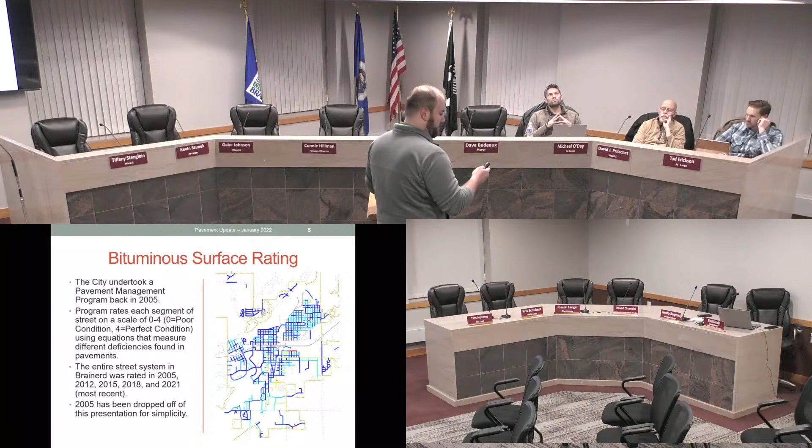So, back when we rated in 2018 compared to 2021, you can see that first line there, 0 being poor, the pavement is completely failed, to excellent being a 4.0. On average, in 2018, the city ranked a 3.35 out of 4. When we rated it in 2021, it was a 3.4 out of 4. So it held pretty consistent.

One thing about these scores is it's very subjective to who's doing it, and people look at things differently. We have interns doing this. We teach new interns every couple of years how to do this and what to look for. And so this data is subjective to who's rating the streets. We try to stay consistent on which segment we're rating, but people do look at things differently. So you'll see some fluctuation in the scores.

For example, if a score goes up from one year to the next, for example the North Annex, 3.81 to a 3.92, we didn't do any construction work in the North Annex in those years, but yet the score went up. That's just a sign of the subjectivity of our data, of who is doing the street rating and how they're looking at different surface deficiencies on the pavement.

So generally, you should see scores that go down unless there's a large project in those 3 years that would indicate the score goes up. We're taking the worst pavements, we're making them new again, and so your score should come up in that area. Southeast is a good example. It went from a 3.31 to a 3.48. We had a large project down there.

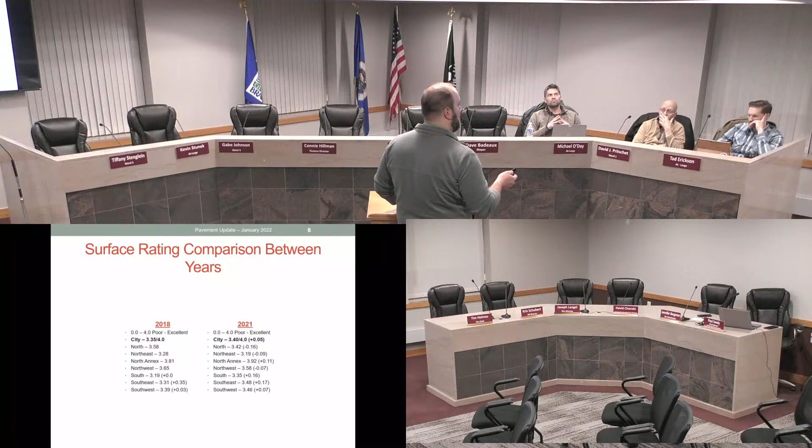This is just an indication of how our pavements are doing, broken down by different areas of town: north, northeast, north annex, northwest, south, southeast, southwest. And it just shows how each of our pavements are doing. So you can see the north annex, that is our best pavements. It's our newest pavements also. And so by that alone, they're going to be doing the best as far as scores are concerned.

You can see that it looks like Northeast is probably doing the worst. Northeast is also our biggest area of streets. It has the most mileage of streets. We have done some projects up there recently, but as the scores would indicate, it definitely needs some more work.

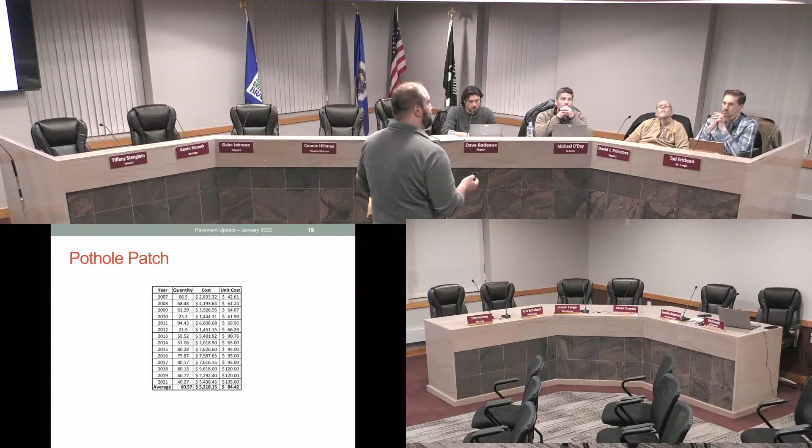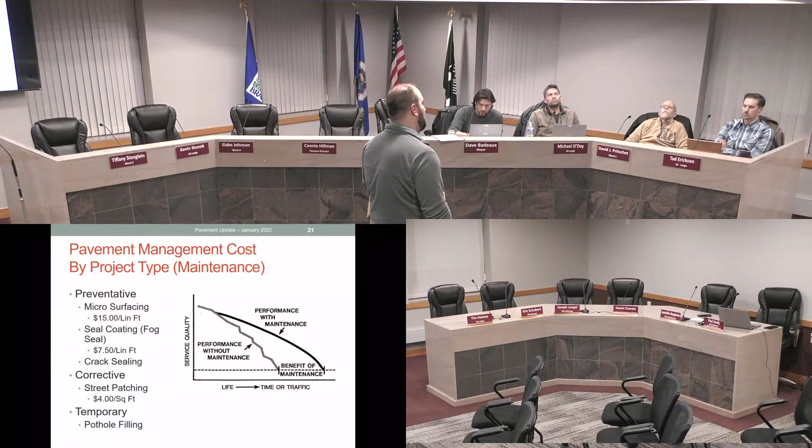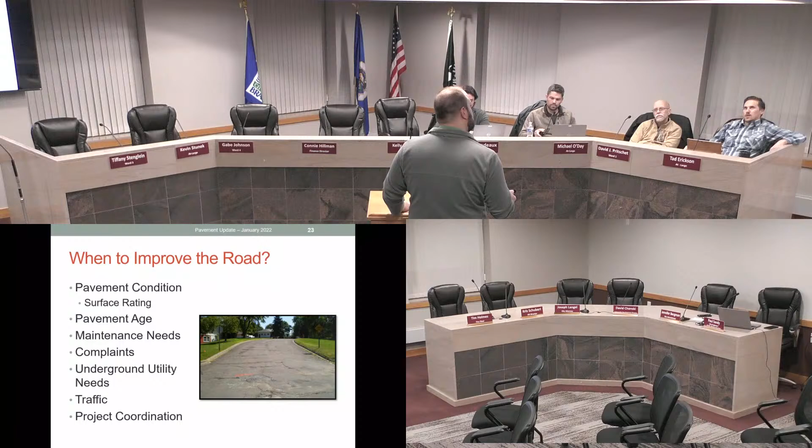More of a comment: you put up the one graph a couple slides back about the $130 per linear foot. That's the total reconstruction, and it's impressed on me. I've seen this before. With the preventative maintenance up front, the goal is pushing that $130 linear foot cost off as far as possible. So the things that you mentioned, like the pothole improvements, the chip seal or the crack sealing, are totally worth the funds to help stretch out that 5-year plan.

Yeah, that's really what you're trying to do, increase the life of the pavement. You can't possibly fund every street you want to do in a given year, and doing that preventative maintenance up front stretches out your funds to make sure that the streets coming into your 5-year plan are in the worst failed condition possible, and you can afford to do all of the worst conditioned streets you can.

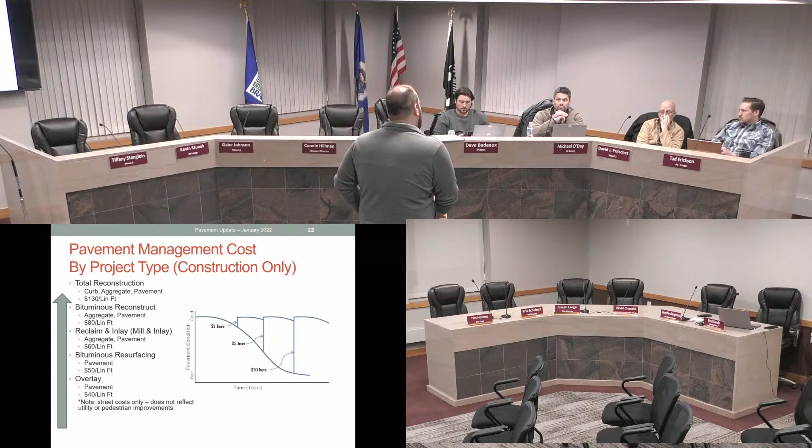We've covered almost half of our 80 miles of streets in 11 years, so you're doing it 4 times as fast as we replace our streets. We're gonna catch up eventually, right? Yeah, I would say we're pretty caught up right now. On average, we should be doing about 2 miles a year of resurfacing or reconstruction. And that puts us on doing every street once every 40 years.

So I'll give the example of a curb and gutter section. We use an 80-year rule. If we install it in year 1, that curb and gutter should last 80 years. So that's 2 pavement cycles. The first 40 years, you go and replace the pavement, resurface the street. The second 40 years after that, we would do a full reconstruct. And so on average, we're keeping up. If you look at that first cost graph, I can show you.

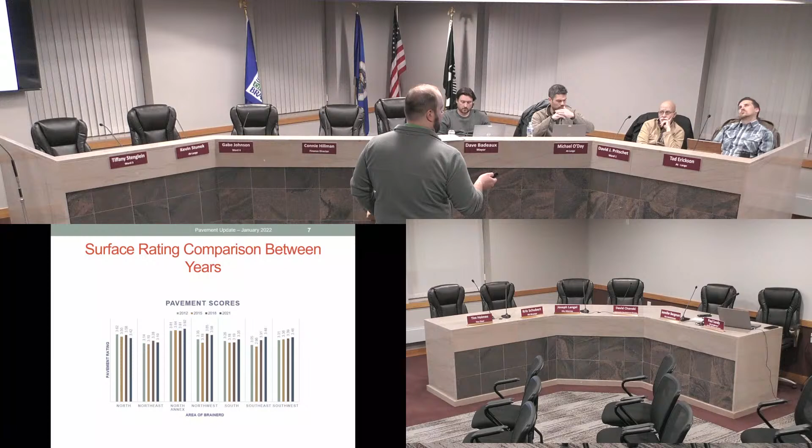Right here, the first number you should look at is that in 11 years, we've done 21.4 miles of streets. So that's reconstructed or resurfaced 21 miles, which is an average of once every 40 years, every 38.91 years. So that's right on target, basically. Maybe we got a little overzealous and did 3 extra blocks, but it's pretty good considering the amount of street system we take care of. And the weather, the nature that we're fighting. Yep.

So from an overall system standpoint, we're in I think very good shape. I think Brainerd street system is very well developed. There's obviously always work that needs to be done. Every time I drive through town, that's all I see is work. But yeah, I think being aggressive these last 10 to 15 years has really paid off. We've really done a lot of streets. We haven't expanded our system, which just, we take on extra liability, right? Anytime we expand, we take on extra liability.

So I do remember, I think College Drive was used as like an experiment years ago, some experimental pavement that didn't really quite work out. In that time, or since then, were there any other pavements or surfacing agents that are more cost effective, last longer, are better for this weather, anything like that coming up that might improve any of this?

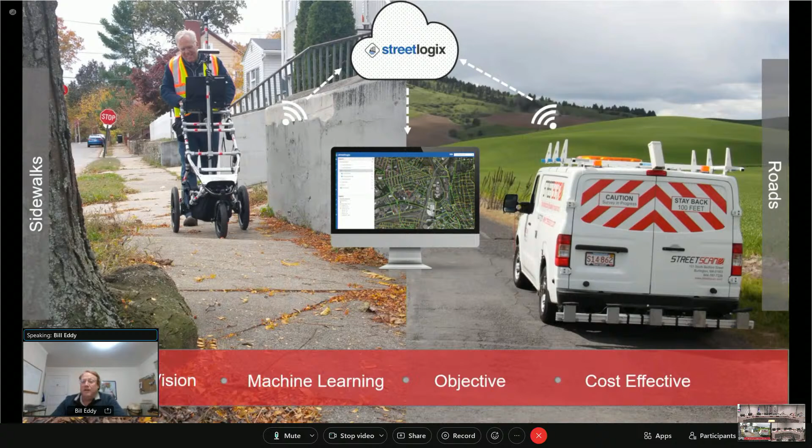So at Street Scan, we've developed an automated approach to infrastructure assessment of roads and sidewalks and other right-of-way assets. We've got a very comprehensive solution that provides objective data and is a very cost-effective approach. We combine computer vision and machine learning to deliver these services, and we've got some specialized vehicles that I'm going to show you here that do these studies.

For the roadways, we have our scan car, which rides your entire road network. You folks have 80 miles or so of roads, and we would do your entire road network. The car is outfitted with a variety of image capturing devices. In the lower right-hand corner, you see an array of 3D cameras mounted on the rear of the car. These are pavement facing, and this is where we're getting very detailed distress data on road conditions.

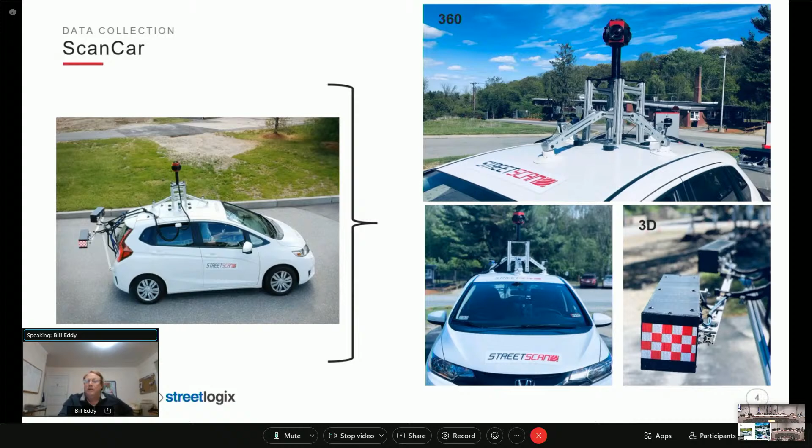On the top of the vehicle, we have a 360-degree camera, or ladybug camera, similar to what you see with the Google cars. So it's like getting your own private Google Street View, and we're capturing not only street images, but also other assets in the right-of-way that you might be interested in assessing and inventorying, things like street signs, street lights and traffic lights. I'll show you a little more detail on that.

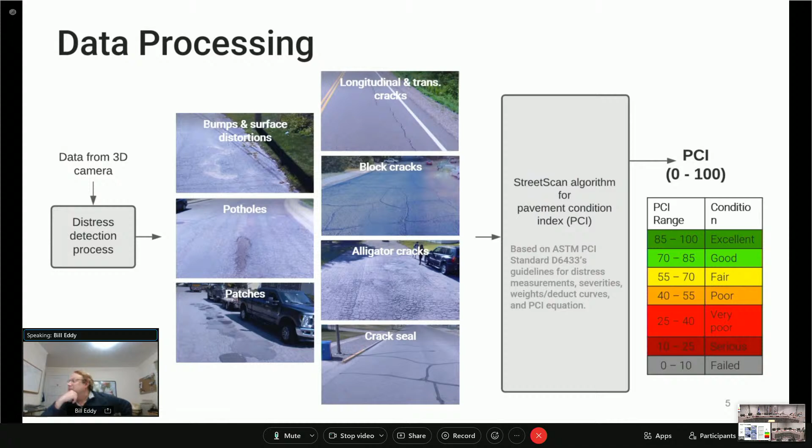Once all of this data has been captured, depending on the size of your network, there's literally terabytes of data generated. We then process that data by applying our artificial intelligence and algorithms to generate street scores based on the ASTM PCI standard, a scale from 0 to 100, 0 being the worst, 100 being the best. We score all of your roads and provide a color-coded map that corresponds with the score each road achieved in the study.

Taking a closer look at the 360-degree camera, we can pull out individual assets like street signs, street lights, catch basins, and pavement markings. These are some of the different objects that can be captured in the right-of-way. We've also found this service is useful not only to the public works folks responsible for maintaining the infrastructure, but the 360-degree imagery can be utilized by other departments, like the fire department, police department, and tax department. So you can get additional value from that service.

For the sidewalks, it's a separate data collection process. We have what we call our scan carts, essentially outfitted with the same types of image capturing devices, and we will walk the entire sidewalk network within the city and create this video library. We're also creating a sidewalk condition index, or SCI score, very similar to the 0 to 100 for the pavement scores.

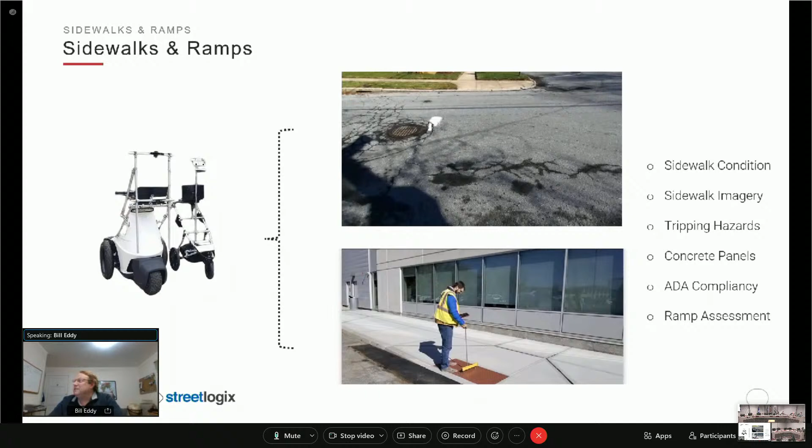This way you're able to categorize the sidewalks and put maintenance activities in place based on their condition. We're also able to capture all of your ramps within the city for ADA compliance. As you'll see when I show you the StreetLogix asset management platform, we create a separate layer for each, so you can click on streets, sidewalks, or ramps, and it will bring up the corresponding data for those assets.

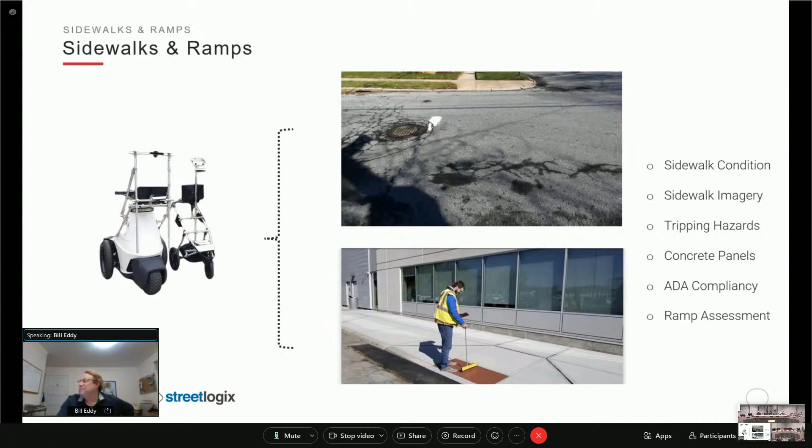So I'm going to jump into the StreetLogix piece now, but we kind of like to equate the data piece, all that data collection, as kind of the body of the solution. But really where the rubber meets the road, so to speak, and where the real differentiators are, is with how do I then visualize and manipulate that data for my maintenance operations.

So the StreetLogix platform is a highly robust, highly customizable platform that allows you to really create budget plans, capital plans. A lot of the historical data, Paul, that you mentioned that you have, can all be loaded into our system. In addition, if we go ahead and are scanning your roads, we include all that data as well.

So I'm going to jump out of this unless there's any questions. I don't know how your time schedule is here tonight. We can answer questions at the end, or if you've got any questions as I move into the Streetlogix platform here. Bill, how much do you have left, do you think, if we just let you roll through it? Yeah, I'd say about 10, 12 minutes. Okay, yeah, go ahead and just finish up. We'll talk at the end then.

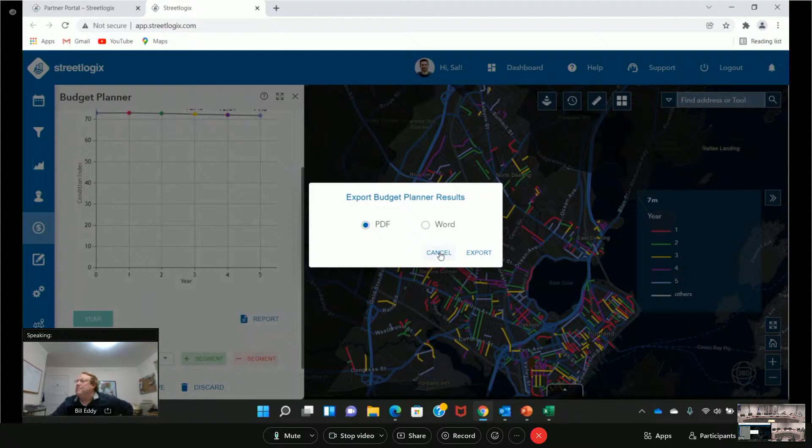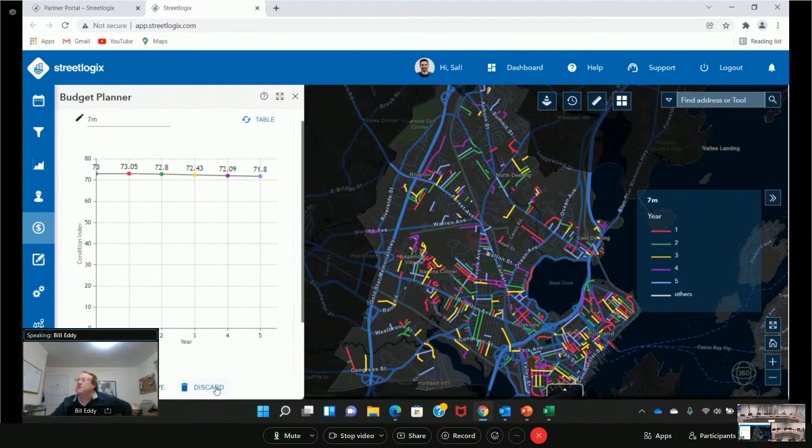We kind of like to call them great budget planning tools, or city council tools, podium ready tools, where you can put in different scenarios, look at different budget levels, and see what's the optimal application for the maintenance funds that you have.

I want to show you also this budget estimator tool. This kind of comes at it from a different angle. So again, we can select the asset, but we'll stay with pavement. Let's say we'll look at a 5-year plan. This is more goal oriented. We're currently at a 73 average. Let's say that we wanted to take that up to a 75 over the next 5 years. What kind of investment would it take to do that?

So I can run that, and the system is going to run through all these different iterations and then come up with, year over year, what investment would be required to get you to that 75 PCI level. And if I like what I see, I can then apply that, and it's going to generate a similar report to what you saw with the previous tool. So it's showing you, year over year, how I can increase that average PCI score for my road network. And then again, I can create a report.

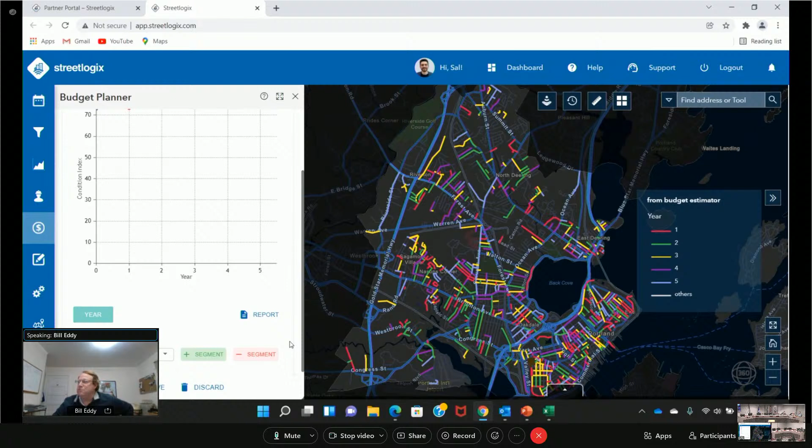I should also mention, you see down here, you can modify these. You can certainly tweak them. You can add segments, move a segment from one year to another, or delete segments if it makes logical sense when you're actually rolling out your pavement maintenance plans year by year. You can make changes to this till you come up with a plan that you really feel is right on.

All right, Bill? So, yeah, I can just also show you quickly some of these other layers that I talked about. Street signs, for example. So here's the layer, I could drill into this. These are all the different street signs that this particular client has. And again, it's in tabular format, so they've got over 21,847 signs. And I can prioritize these for replacement, for maintenance, what have you.

I can see this is very comprehensive. It's pretty impressive stuff. And it seems to me like this is exactly the kind of software that you would benefit from to make things more efficient. What it's going to come down to is, is the cost worth it? So I have a spreadsheet in front of me that tells me it's

$59,690 one-time fee, and then it's $5,750 per year annually just to basically maintain, and rescan every 5 years, or every 3 years? The total cost yearly is that 12,000 number you see. So the annual fee for the software or the licensing fees is that 5,750 number, and then the average cost per year over 5 years to rescan the streets is 6,320. Those two added together is that 12,000.

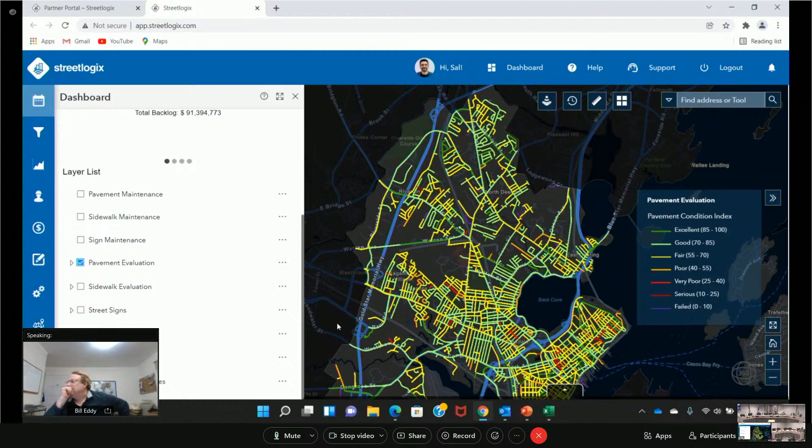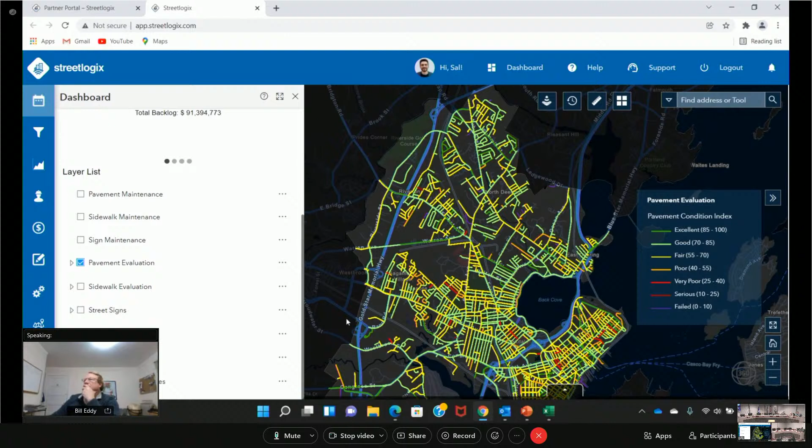coming from. And so the intern's cost, a lot of that is assessed to adjacent properties, and it's coming out of construction fund 401, which is the fund that we fund all of our street projects with, and is kind of unbudgeted. It has a 5-year capital plan, but it's not a budget that the city council adopts year over year. Okay. So my thought process is we drop back to an intern a year, and we already make up that cost of that 12,000 a year. Okay.

Bill, so first of all, thank you, and this is Tad, really good presentation, really impressive software and technology, as the chairman said. And what you presented to us, and I'm looking at the proposal as well, it looks like that's probably the deluxe version, and there's several items in here within the proposal, and I'm just wondering, what flexibility is there in kind of picking and choosing? Is there kind of a menu option? And maybe Paul, maybe more of a question for you. Is this scalable, or is there kind of an a la carte? We can pick and choose some of these items to also defray the cost.

It's a good question. From the proposal that is in your packet, we selected the items that we thought would be beneficial for us. So that spreadsheet in front of you, those are the items that staff felt would provide a lot of value to us. There's a lot of other options. I think they have a work order management module and a public engagement module. Really, we're not big enough, in my opinion, to have a work order type module. And there's other things that they can collect when the car is driving that we don't feel would be beneficial to us. And so what we have here in this table is what we thought out of the proposal would be beneficial to us to have that data.

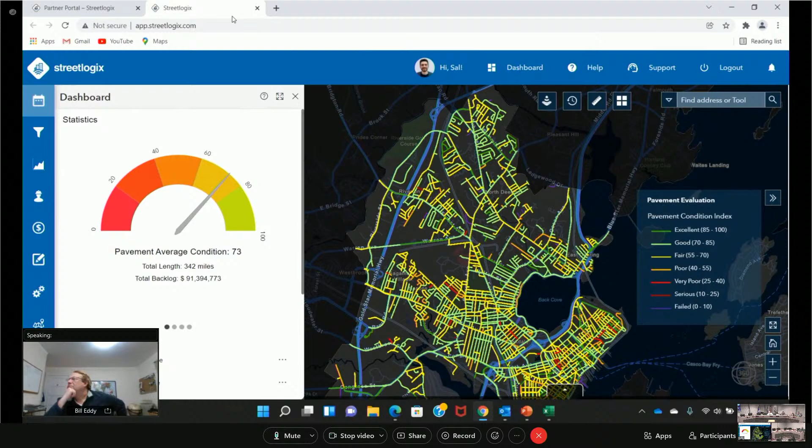Well, so to answer your question, Mr. Pritchett, when we get the data done, we'll actually put it in. I can show you the spreadsheet if we have a few minutes here. Sean, can you switch me back to presenter view? Oh, I suppose it's got to be over here again.

Yeah, I think I'd have to see how it fits in the overall budget. I'm not dead set against it, but I'm a little concerned about the upfront cost. Yep. So I guess what staff will do is when we come back with the 5-year capital plan, we'll include that in there, so you guys could kind of see. Yeah, options with or without.

Yep. Okay, great. Bill, thank you for that presentation. Appreciate all the info. Absolutely, you bet, gentlemen. Thank you for your time and the opportunity to speak with you. Thank you.

All right, we still have a fourth item. We're gonna review the streetlight policy capital project cost examples. Yeah, you can take it over, Sean. And Mr. Sandy, if you wanna jump into that one, we got about 15 minutes until council. If we can get this down to 5-10 minutes of discussion, that'd be great.